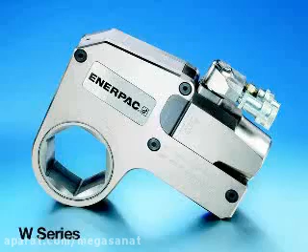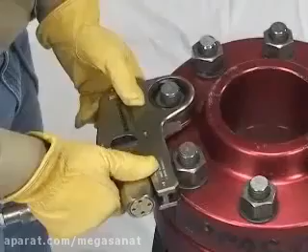Specific layout and use of the wrench. The W wrench: how to use your Enerpac W series low-profile hydraulic wrench. In this section of the video, we will review the safe operation and general maintenance of the Enerpac W wrench.

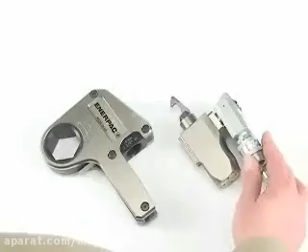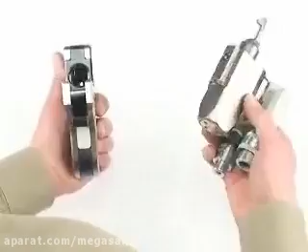To attach the cassette to the W wrench, first make sure that you are not connected to your pump. Next, slide the head release lever out as shown on the cassette. Then slide the drive unit into the opening slowly, making sure you keep the retract link aligned with the slot. Once the base of the drive unit bumps up into the cassette fully, flip the lever back into the cassette. Verify there is complete engagement of the two components by trying to pull them apart.

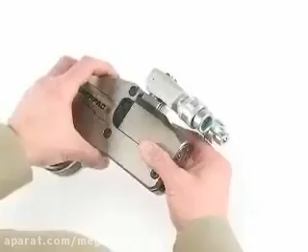To remove the cassette from the W wrench, first verify that the system does not have any pressure in it. Then hold the tool with the retraction foot pointing out. Pull the head release lever outward and slide the cassette apart from the drive unit.

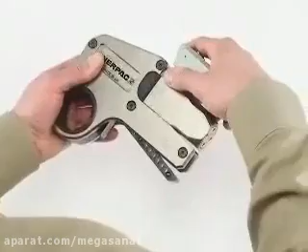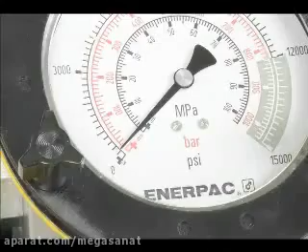To connect hoses, first make sure the hoses match the pressure rating of the pump and the wrench you will be operating. Make sure there is no pressure in the system. If there is, turn off the pump and depressurize before proceeding. Remove the hose dust caps. Notice that there are male and female couplings on the hose and on the W wrench. Verify the couplings are clean and free of debris.

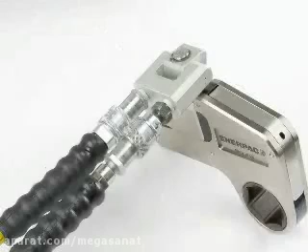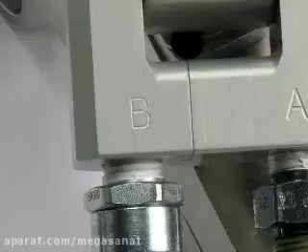Connect the hose with the female coupling to the advanced side of the wrench. The advanced side is marked with an A. Slide the sleeve down over the advanced coupling and hand tighten completely. Connect the male hose coupling to the return coupling on the W wrench. It is marked with a B. Slide the sleeve in place and hand tighten completely.

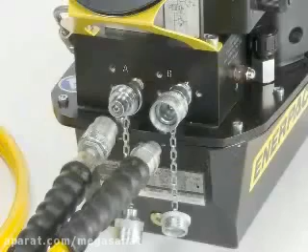Fit the hoses to the pump and follow the same procedure as with the W wrench. Remove the dust caps from the hose and pump. Similar to the hose and wrench, there are male and female couplings on the hose and on the pump. Verify the couplings are clean and free from debris.

Connect the hose with the female coupling to the advanced side of the pump. The advanced side is marked with the letter A. Slide the sleeve down over the advanced coupling and hand tighten completely. Connect the male hose coupling to the return coupling on the pump. It is marked with the letter B. Slide the sleeve in place and hand tighten completely.

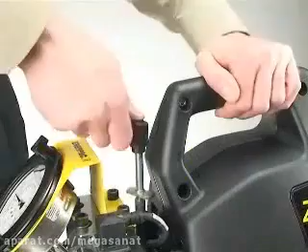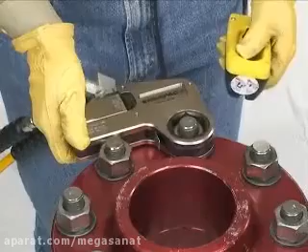Pump operation and setting torque. Adjust the pressure on the pump as necessary to set the torque desired. You can use the settings listed in your pump's manual to set the pump pressure, or go to the bolting calculator at www.enerpac.com. When possible, a single user should operate the Z-Class pump and the W wrench. This can help prevent accidental activation of the pump while the operator is positioning the wrench.

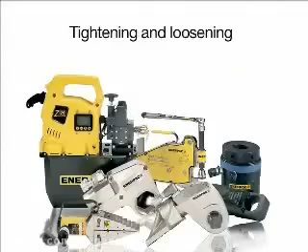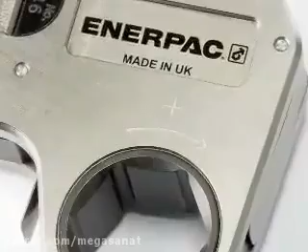Tightening and loosening positions. To tighten a bolt, you may first want to make sure that you are using the proper lubricant to assist in the process. Next, find the plus sign on the side of the W wrench cassette and position it facing you. Place the cassette over the nut you would like to tighten. Position the reaction foot against a suitable reaction point. The reaction point will counteract the force caused by operating the tool.

Start the pump. Operate the tool to tighten the nut. Stop the pump after the work has been completed. When torquing, it is common to tighten only one bolt at a time. This can result in point loading and load scatter.

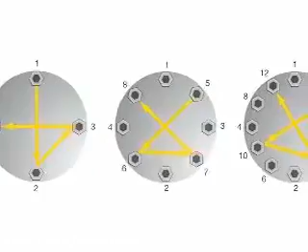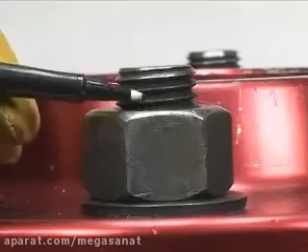To avoid this, torque is applied in stages following a prescribed pattern in 4 steps. Tighten the nut spanner tight, ensuring that 2 to 3 threads extend above the nut.

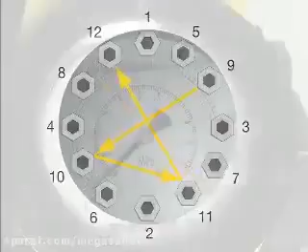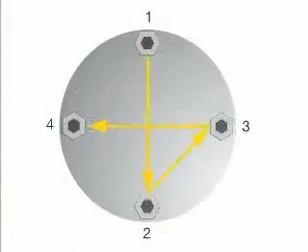Tighten each bolt to 1/3 of the final required torque following the star pattern as shown. Then increase the torque to 2/3, following the same star pattern. Increase to full torque on the 3rd pass, again following the same pattern as used in steps 1 and 2. Perform a final pass on each bolt, working clockwise from bolt 1 at the full and final torque.

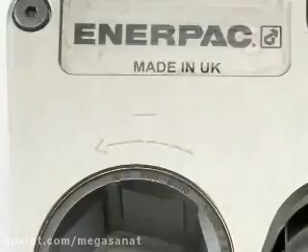To loosen a nut using the W wrench, you may first want to apply releasing oil to the threads and allow the oil to penetrate. Hold the W wrench with the minus side facing you. Place the cassette over the nut you would like to loosen. Operate the pump and W wrench until the nut is loose.

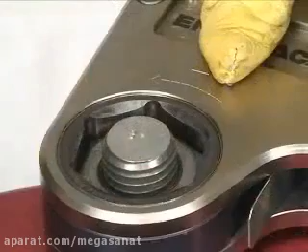When loosening bolts, a torque value higher than the tightening torque is normally required. This is mainly due to corrosion and deformation in the bolt and nut threads. The breakout torque cannot be accurately calculated. However, depending on conditions, it can take up to 2 1/2 times the input torque to break out.

The use of penetrating oils or anti-seize products is always recommended when performing breakout operations.

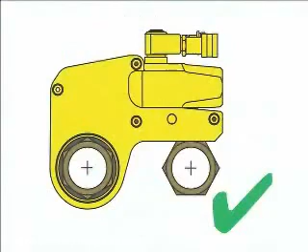Safe handling of the W wrench, some do's and don'ts. This is how to properly locate the W wrench using the reaction arm. The incorrect placement: if the reaction arm is placed incorrectly, it may actually damage the nut or the wrench.

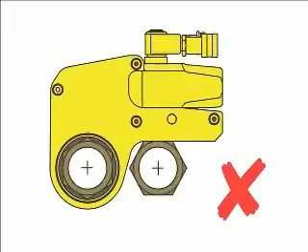Incorrect placement can also occur if the nut is too close to the wrench and the reaction arm cannot be positioned properly. Be aware of pinch points from the reaction foot, which can pinch your fingers or the hose if you are not careful.

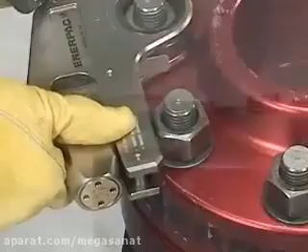Correct use and location of the W wrench is shown here. Make sure the W wrench is balanced as in this view.

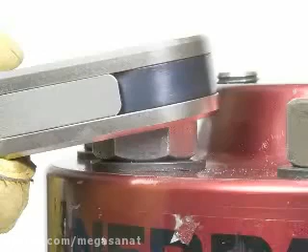Incorrect use occurs if the W wrench is placed improperly on the nut and associated surface. Damage could occur to the nut or the W wrench, or injury to the person holding the wrench.

Make sure there is sufficient clearance for the W wrench so it is allowed to move without binding up on any nearby surfaces. Damage to the W wrench, the nut or bolt, and injury to the user may result if there is not proper clearance for the wrench.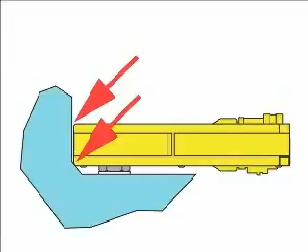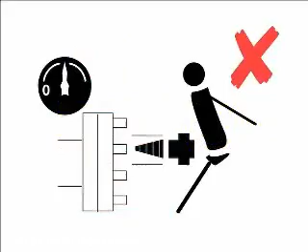Make sure the correct size cassette is used on the nut. Reducers are available for common sizes. Do not work in line with the bolt if you are tightening or loosening.

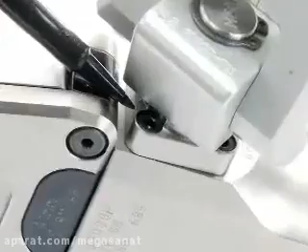Preventive maintenance, the drive unit. Check the tightness of the swivel manifold pin screws. Remove the drive unit from the cassette and dry all components. A mild solvent can be used to clean the W drive unit and cassette.

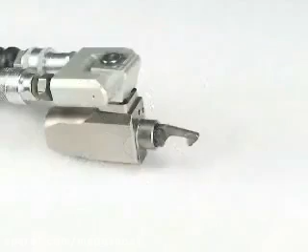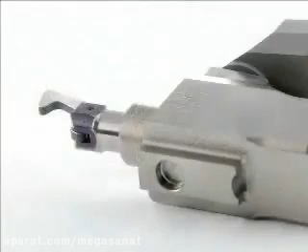Pressurize the drive unit to maximum pressure. Advance and retract, and check for leaks. Damaged components or seals must be replaced. Apply a thin coat of molybdenum disulfide to the locations as shown.

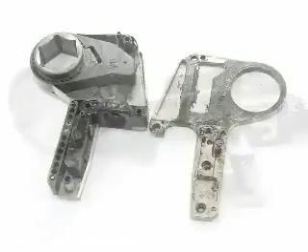Lubricating the W series cassettes. Remove the head from the drive unit. Remove the screws, then lift and remove the side plates. Remove the hex ratchet, spring-loaded drive shoe, and compression spring.

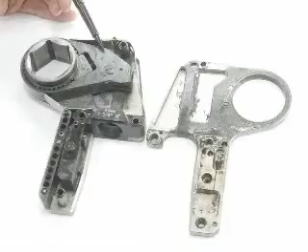Clean all parts with a mild solvent. Inspect all parts for damage. Dry all components and apply a thin coat of molybdenum disulfide to the locations as shown. Do not apply any lubricant to the ratchet or drive shoe teeth.